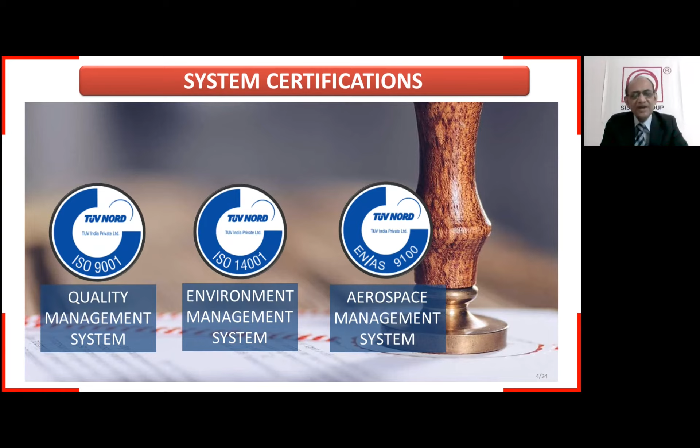While we have done this, we have been able to conceive products which can serve the world at large. We produce tubes and related products from steel as well as aluminium, with the focus being on precision drawn tubes. These variety of tubular products are produced for woven sack, FIBC, multi-filament yarn, geotextile, and carpet industry.

Not to leave behind, we also do a lot of work for aerospace, defense, automotive, telecommunications, and automation industries. While we do this, our products are reaching more than 30 countries on a consistent basis. Countries like Israel, Indonesia, Italy are some of our major buyers.

And while doing so, our organization has received more than 45 awards at the national level. Prominent among them are Export Excellence, Research and Development, and Entrepreneurship. As a result of all this, we have received a patent for a product for which we are going to talk in a few minutes. The patent is for induction hardening treatment at steel cheese tube edges for high impact resistance. I repeat the word high impact resistance at the edges.

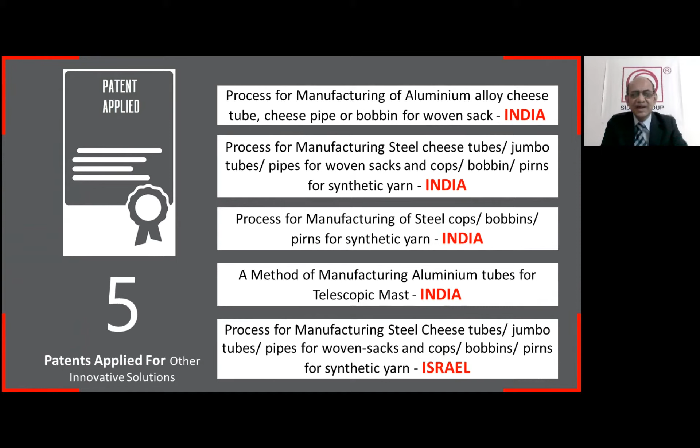In addition to this patent that we have received, we have applied for several patents, one of them being in Israel also. Now, the patent applications and the patent received only lead us to show that we have tried to create something useful for industrial use, and which has happened for the first time in the world.

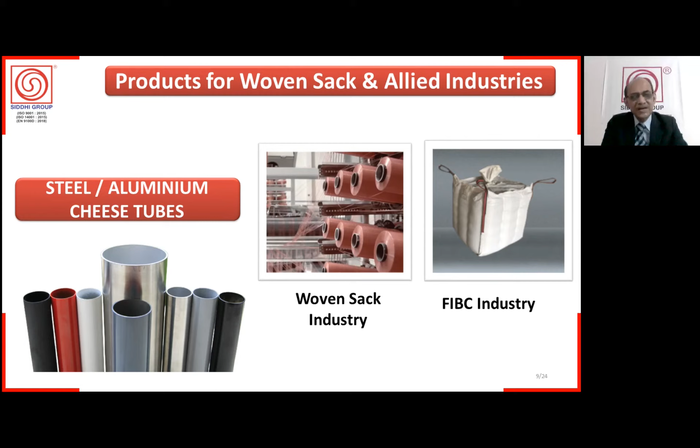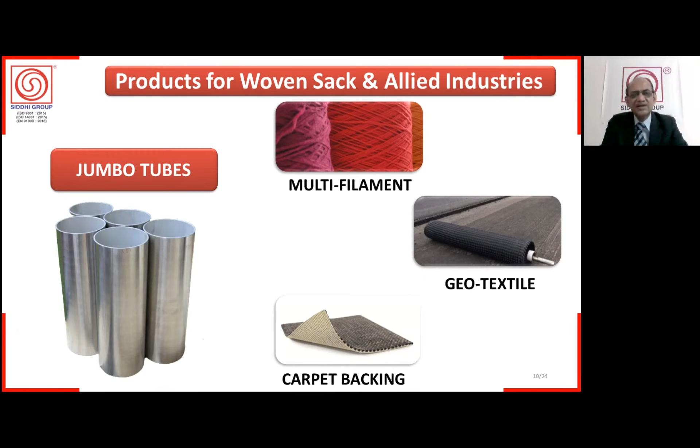Moving on, I would like to share that we have conceived several products for woven sack industry, FIBC industry, multi-filament yarn industry, carpet industry, and geotextiles. In fact, geotextiles is now gaining tremendous momentum because it is increasing the life of the roads, the infrastructure that is getting created in terms of canal, etc.

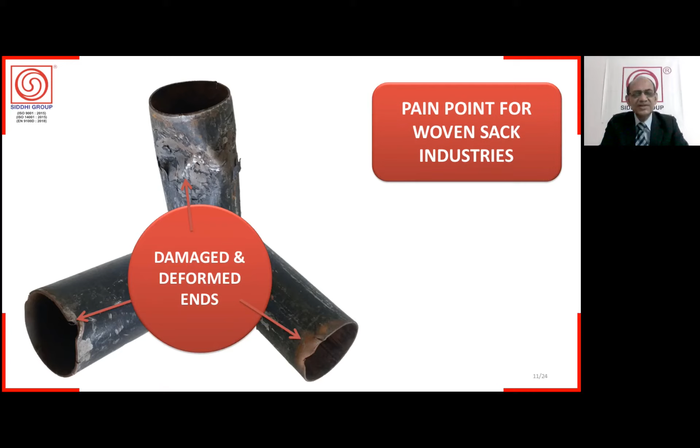And for all these products that we have conceived, what we do is we go to the plants, we remain there for many hours to understand the pain point of the industries. While we visited woven sack industries, we observed that most of their cheese pipes, or as they call cheese bobbin, they normally get damaged at the ends. And this is the most moving part in the whole woven sack industry, from winder to the loom and back, day in and day out, 365 days, 24 hours. This part continues to move.

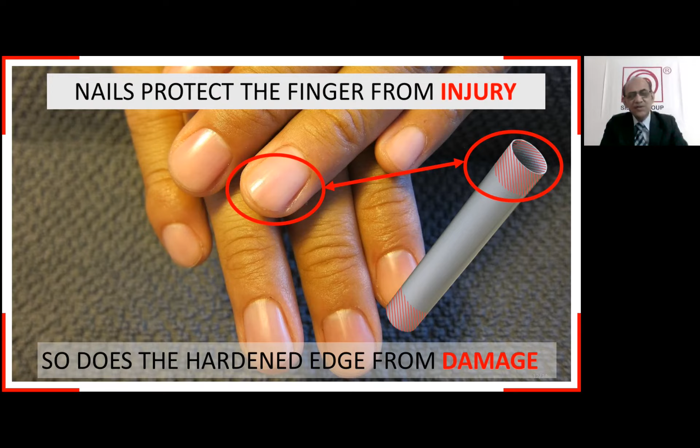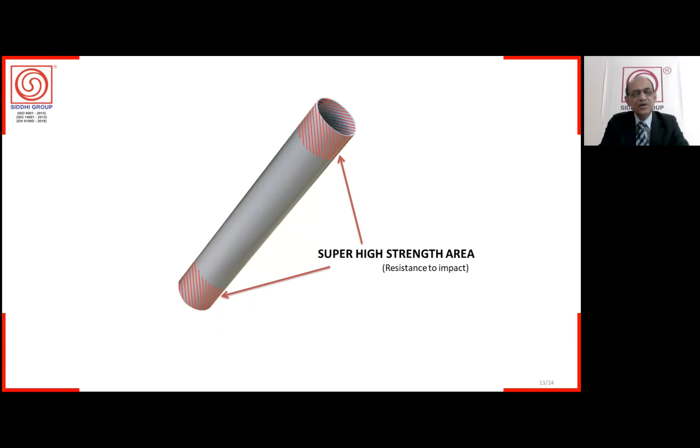And we observed that there is an analogy between our human anatomy and the cheese pipes. Our fingers are protected by our nails from the injury. And likewise, we thought we should create some features which are imbibed within the cheese tube or cheese bobbin, and so we created the hardened edges to prevent the cheese pipes from the damage. Now it was very important that while we create the hardened edges or hardened ends at the particular portion of the cheese pipe, say about 25 mm long portion of the cheese pipe, it was very important to have a combination of strength and ductility in the central portion where the flat tape is wound.

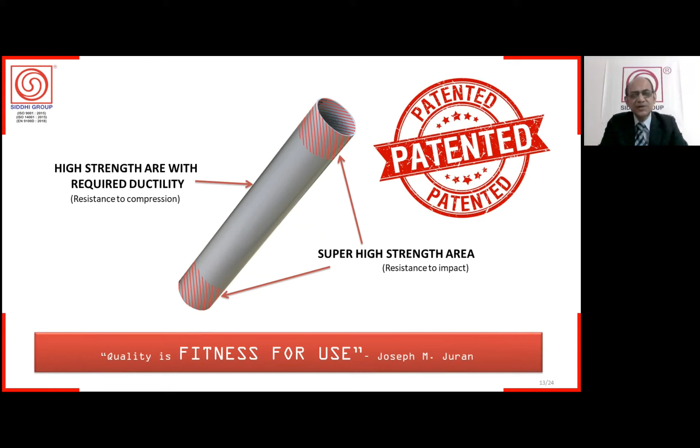This was done specifically at the ends because we remembered what Joseph Juran said. He said, quality is fitness for use. Here we have created a functional advantage by imbibing such feature, and the value addition that has been done is now proven. Several customers of ours in India and abroad have used these tubes by now, and they are experiencing the advantage of increased life of cheese tubes. This is increased by number of cycles due to better mechanical properties at the edges, that is the ends. And this has resulted into a wonderful advantage in terms of reduced cost per cycle and reduced cost per kilogram of production.

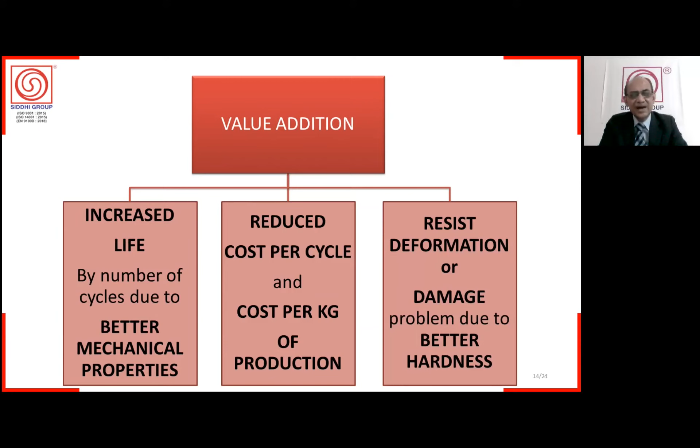Normally, everybody today is in a race to reduce the manufacturing cost through productivity measures. Here, a product coming from outside the plant is helping to reduce the cost in a major way by increased life, reduced purchase frequency, reduced space requirement to store the damaged bobbins, and many more things. Now all this has happened because of the fact that the tube itself is resisting deformation or damage, and this is because of better hardness at the ends of the tubes. In addition to this, we have imbibed several other small but very important features in the product.

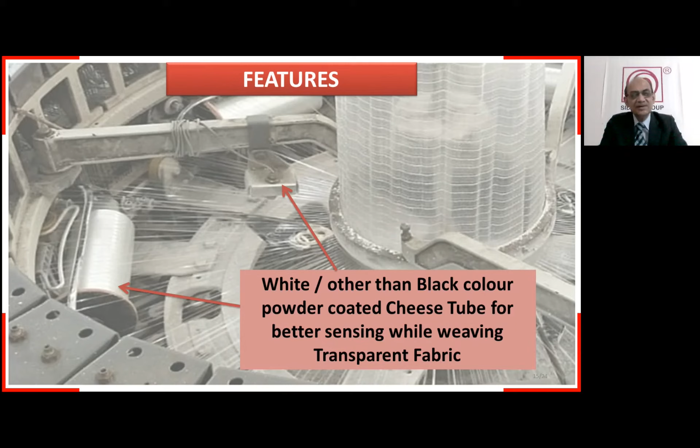For producing transparent fabric, which is utilized, for an example, for packaging of the food grains, one has to use either white or other than black color powder coated cheese tubes for better sensing while weaving of such fabric. And what we have done is, after studying this requirement, we have opted for several useful colors like red, green, even yellow, in addition to the white color that they required. Many a times they produce the cloth which is in checks format, white and black. Again, the white cheese bobbins are found very useful by them, and it has added value in their factories.

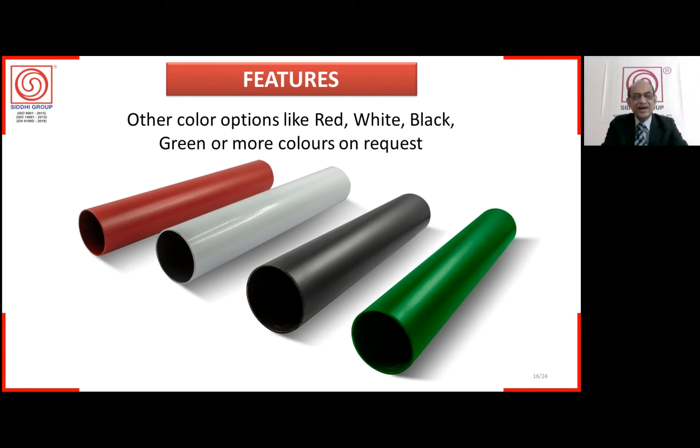We have also created a longitudinal groove for removal of bottom residual layer of yarn. Now, normally in several plants, this was an issue, and the methodologies that are being used in terms of either using the heating element or the scalpel, this particular small feature has helped the companies to get back the bottom layer in the scrap form in a good way without damaging the bobbin surface. We also have tried in terms of aluminum cheese bobbins, where normally the anodizing is done, which is very long lasting, but on demand we have also introduced powder coating like the steel cheese bobbins, so that it creates economy for customers who desire to do so.

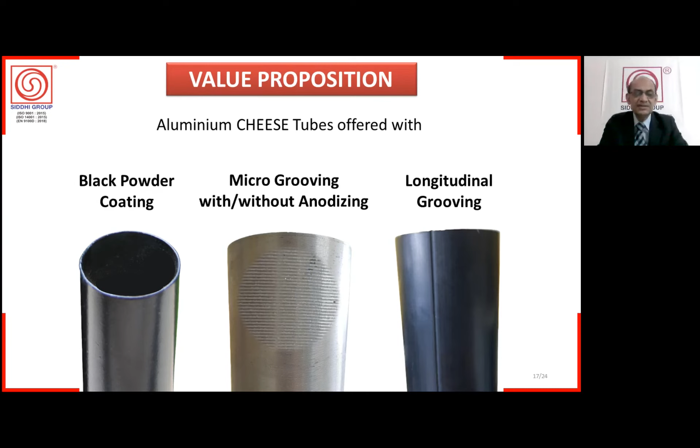While doing all this, we have also taken care of small aspects, like whenever the customer approaches us, he desires to see the samples. We keep samples of all the range of products ready, and normally within India it reaches the customer in 2 to 4 days time, and throughout the world it reaches within about 7 to 10 days time. We have also taken an approach that once the samples are approved, customer might like to have a small trial lot.

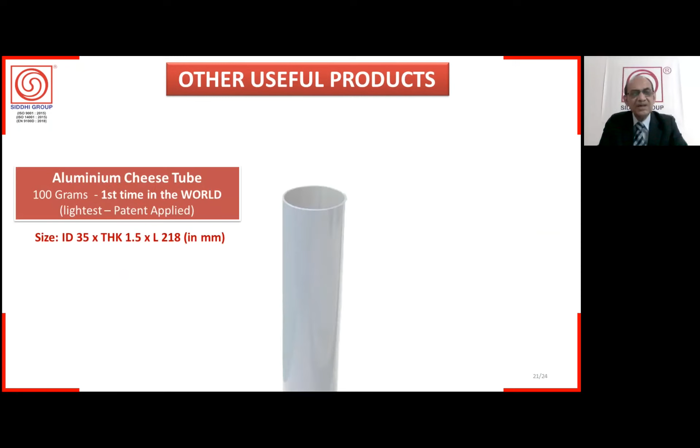Here it is very important to note that those multi-filament yarn companies who have the twisting process in their own plant find the aluminum tubes to be of immense use because it is utilized for internal rotation only, and they don't have to get it back from their customers.

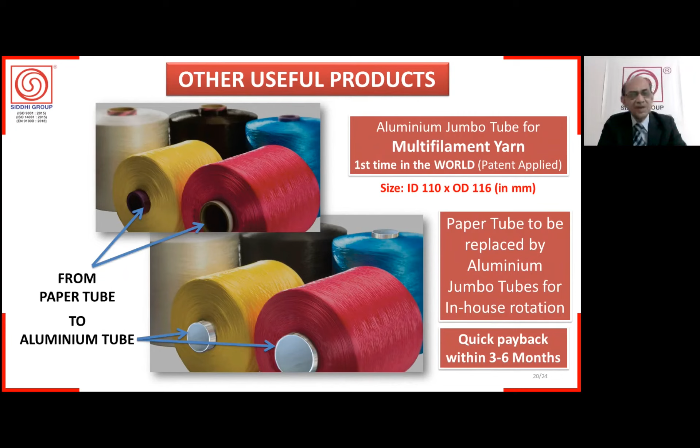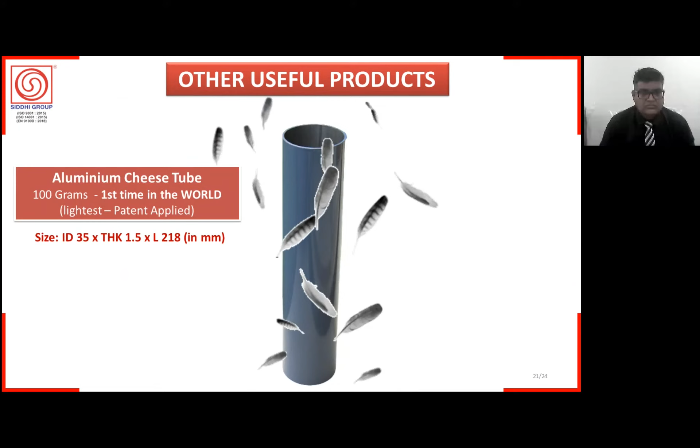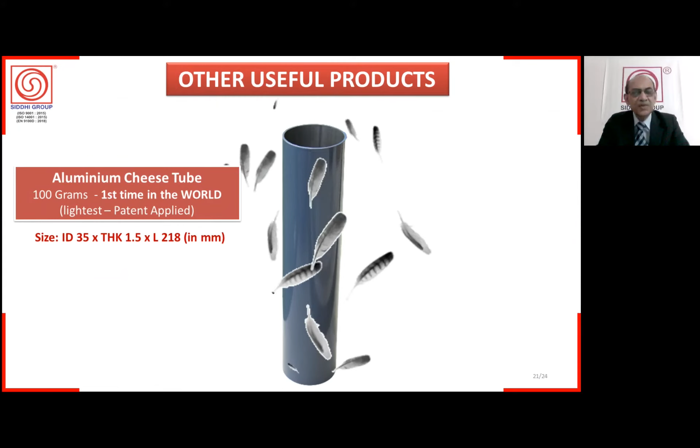Now coming to one of the very useful innovations that we have made, you can see the feathers here. We call this particular cheese tube feather light bobbin. We have created an aluminum cheese bobbin which is only 100 grams. This is for the first time in the world that such a light product, and I am aware that very learned individuals who are here with us today would appreciate what kind of advantage this product would deliver in terms of the long-term maintenance of the machines, human fatigue, ease of transporting, and many more.

I would like to share with you that this product has been used by a few customers already and found very useful. We have created several useful videos which actually span for about 1.5 minutes, so that many of our customers and prospective buyers throughout the world can get a glimpse of what is available for them.

Here I would like to share a very useful message with which I started my presentation about friendship for life. You see, what we have done in a nutshell is that we have created several useful functional features in the products, which ultimately improves the quality of flat tape winding and the yield at the woven sack factories and various other allied manufacturing units. Additionally, talking about life, I would say that we have sent and are sending this product to you with a culture of long life imbibed within the product.

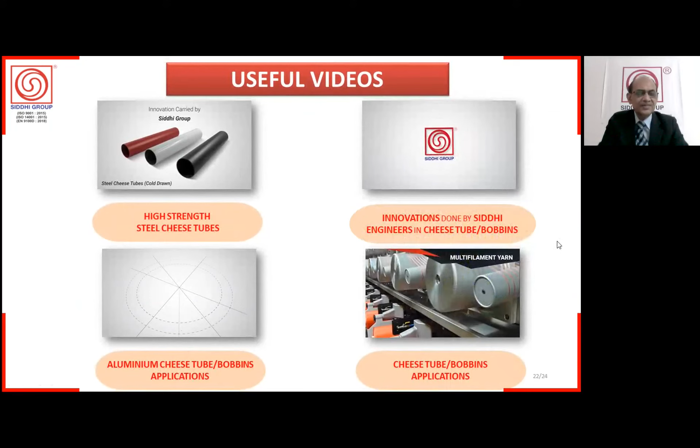What we have done is we try to change the metallurgy through enhanced metallurgy aspects. We try to cold draw the tubes so that one gets very accurate and straight tubes, and we also provide heat treatment suitably so that all these features provide excellent life and functional features. I would like to share here that from India, from Gujarat, from Ahmedabad, we have the opportunity to share wonderful products which can be useful throughout the life of the product after we deliver the same to you.